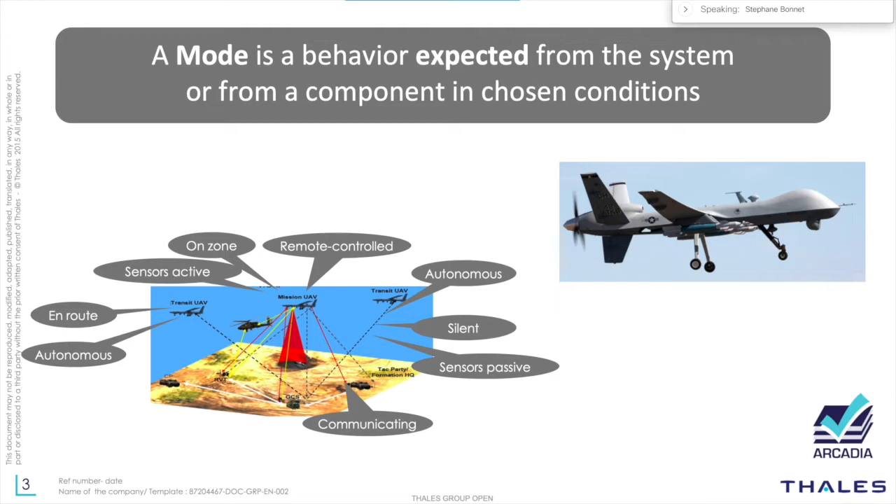A mode is a behavior that is expected from the system or from a component in chosen conditions. So if I take the example of a drone, the drone can be in autonomous mode, it can be en route, it can be on zone, remote controlled, silent, communicating, and so on. So these are all contexts of operation that are planned and that are part of the capabilities of the system.

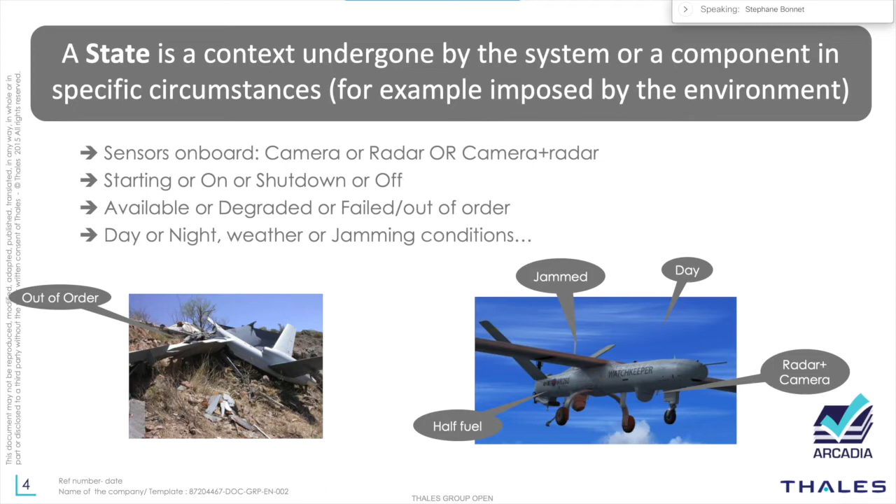A state is a context that is undergone by the system or a component in specific circumstances. Sometimes these circumstances are imposed by the environment. The tank can be half full. We can have night and day, different combination of sensors, not necessarily chosen, but this is something we have to cope with. And this is the main difference we do between modes and states.

A situation is a combination of states and modes at a given instant. So for example, we might have different phases in the missions. The system might have different modes, for example, autonomous or remote controlled. And then each of the subsystems might have their own state machines and mode machines. So what we call a situation is really one given context selecting the current mode or the current state in different modes or state machines.

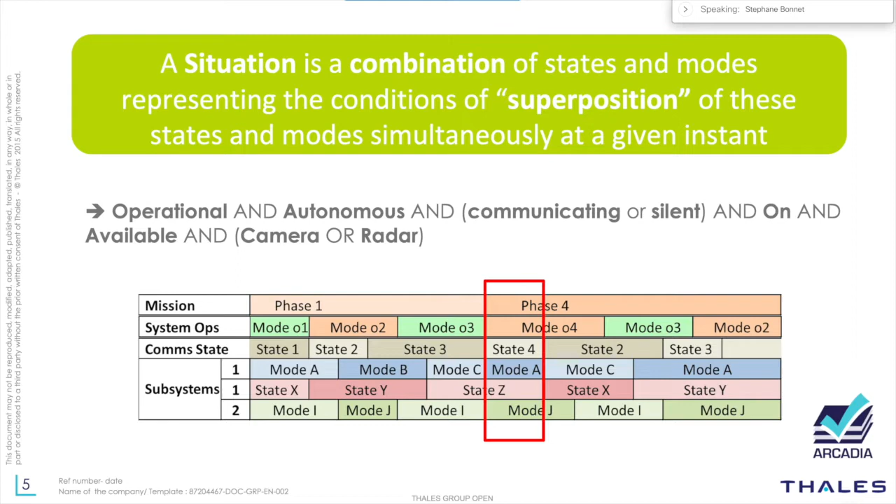A configuration is a set of system parts or capabilities or functions that are globally available or unavailable in one given mode or state. So for example, reconnaissance or localization or targeting capabilities and so on might be available or not, depending on the current mode or the current state. So we'll see how we will use the configuration concept to specify the impacts of modes and states on the architectural design. Later in these slides, you will understand why this box is red on the left and kind of greenish blue on the right.

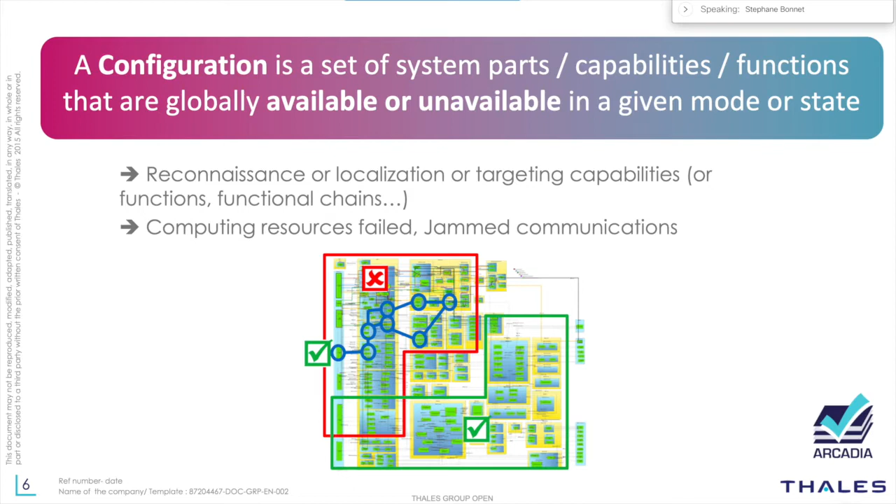So what are we trying to do here? Our systems are, of course, more and more complicated, and what we are expecting from the systems is also more and more complex. So what we are trying to do is to understand how the system will behave in specific situations, situations being a combination of states and modes. We want to be able to predict or anticipate the system behavior. We want to be able to compute or to perform non-functional analyses in different situations.

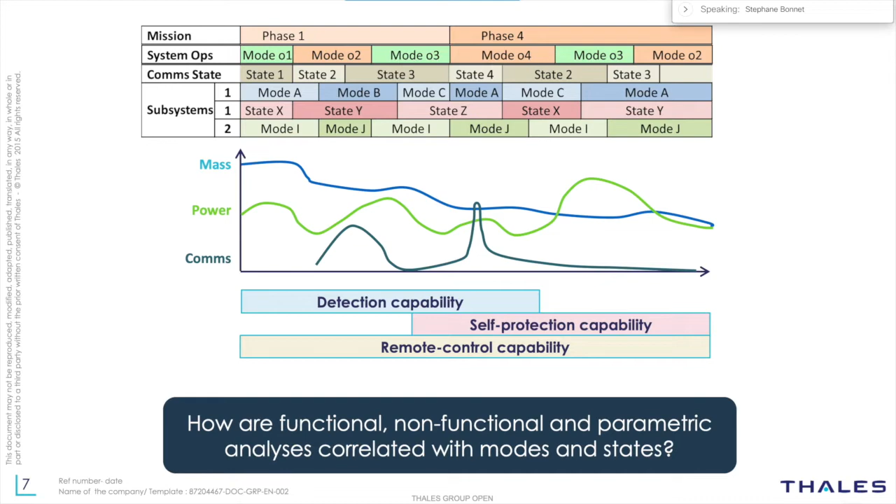So this is basically the problem we are facing, and the problem that our systems engineers, when they write their design documents and so on, struggle to capture. So I will start with the methodological approach, and then I will illustrate it with a use case. The methodological approach has been the most difficult part and the biggest achievement of this effort.

We knew how our systems engineers were working, basically doing matrices and tables, establishing correspondences between modes and states and relating them. We implemented the concept of configuration to help our systems engineers specify what was available in one given mode or one given state. And we gave them a prototype. They played with this prototype, adding the configuration concept to Capella, during about 1 year. But the experimentations were not really satisfying.

We were not able to put our finger on what was missing in the articulation between the concepts of modes, states, and configuration. Until one day, in the middle of a brainstorm, we kind of saw the light and saw that what was missing was the concept of situations. So back on the methodological approach. So everything starts with modes and states. We introduce the concept of configuration to specify what is available in terms of functions, components, interfaces in one given mode or in one given state.

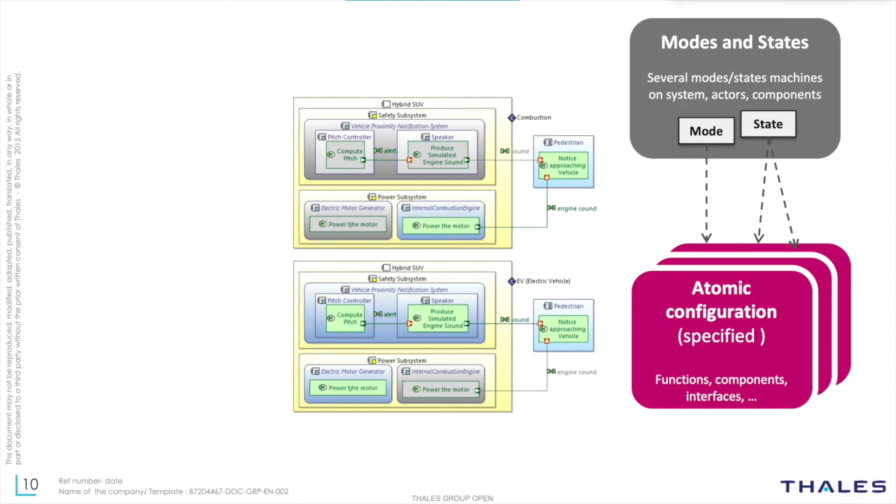In the Capella diagrams, we are now able to preview the impact of one given configuration on any component. In this example, on the top we see a hybrid SUV, which is in combustion mode, and all the elements that are not part of these configurations are grayed. In the bottom, this is the opposite. We visualize the electric mode, and then only one component is grayed. So we specify atomic configurations that describe what is exactly available or not in one given mode or one given state, and we preview that in Capella diagrams.

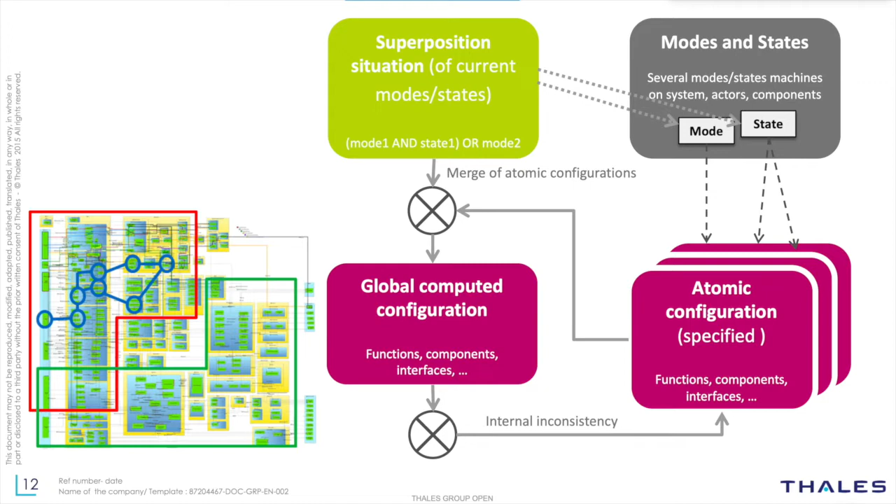Based on this situation, and based on the atomic definition of what is available for each mode or each state, the tool is able to merge the atomic configurations and compute a global configuration that specifies what is present, what is not. Here, we can sometimes detect inconsistencies, because in one mode I've specified that one function is present, and in another one I've specified that the function is not present. This might be a specification issue. This might be an architecture issue. So we can rework it until we reach a satisfying global configuration.

On the other side, we can also use the configuration concept to express the expectation we have from the system in a specific situation. Here, we would rather associate functional chains and scenarios to this configuration of interest. And what we want is to make sure that these functional chains and scenarios can be played entirely in one given situation. So to do that, we are going to compare this global expected configuration of interest and the global computed configuration that is the sum of all the atomic consequences of each mode and state that is part of the situation.

So this is the general frame of the approach, and this is relevant for system, actors, components in any Arcadia perspectives. We can conduct the same kind of approach in system need analysis, logical architecture, or physical architecture. The principles remain the same. And what we see on the slide is really the complete approach, but it is really possible to have only a partial application of that. Some projects will only care about working on the consistency of the atomic configurations, and some others will maybe not associate atomic configurations to their modes and states and will only have global configurations of interest to capture what is expected by the customer, for example, in specific situations. So we can have partial applications of this approach.

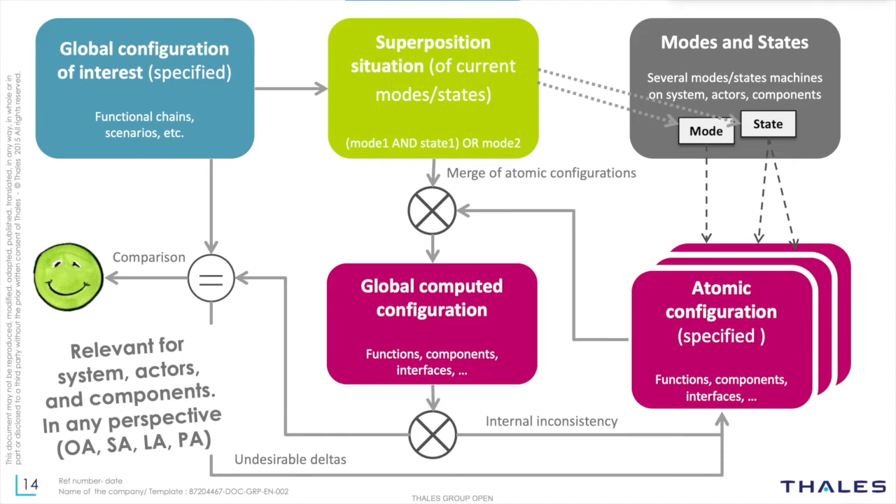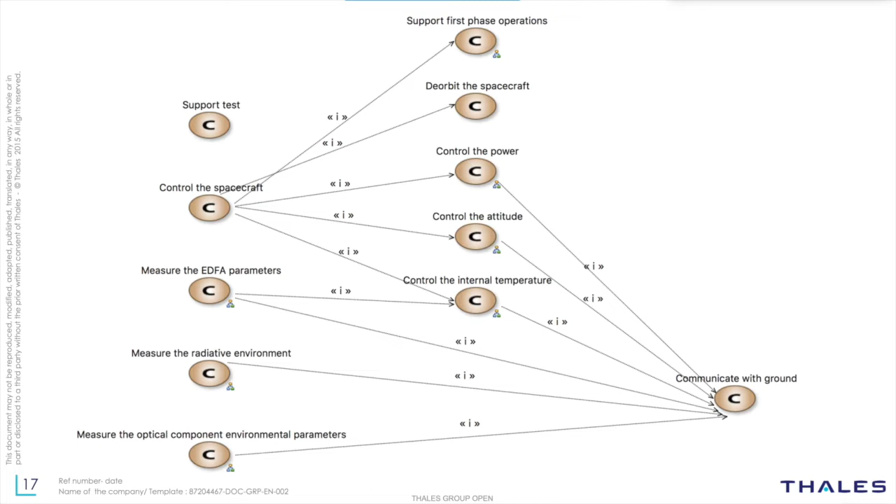What you see on the slide is a lot of flashy colors. They have a purpose. They will help relate the method steps in the case study that I'm going to explain now. So the case study is a small nanosatellite that is dedicated to the measurement of environmental conditions that are undergone by the payload. They basically try to measure the deterioration of hardware components that are sent in the space environment. So it's a simple system that covers measurement activities, capabilities to control the spacecraft, and of course, communications. These are the main capabilities of this simple system.

Our goal is to support system specification elaboration and help analyze its consistency. It's to support the architecture early validation, and in the space domain to support fault detection, isolation, and recovery. So first, I will really focus on the system specification, so the system need analysis in Capella. So everything starts with modes and states. We have several mode machines and state machines, so there's nothing new here.

We have the system modes, so the system modes are fail-safe, detumbling, safe mode. When the nanosatellite is operational, then it can be nominal or no communication, in experimenting or no current experiment, or the satellite can be in eclipse mode. We have states for the environment. Is the ground visible from the satellite, or is the ground not visible?

Is the sun visible from the satellite, or is the sun hidden? And we also have the system phases that we specify using modes. So there's the launch, the transfer, then the satellite is in orbit, and then it's deorbiting.

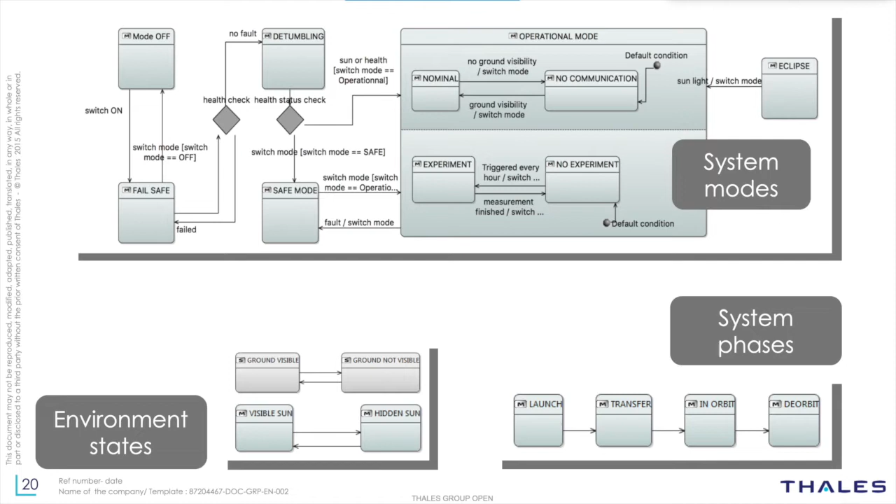So there's nothing new here. This is pretty standard. We can associate transitions to functional elements and so on. This is all things that have always been available with Capella. You can exploit these modes and these states in Capella sequence diagrams or interface diagrams and so on. So the same, nothing really new here.

What is new starts here, when we start to introduce these configurations. Configurations can sometimes, or maybe most of the time, be mapped in a one-to-one relationship with the modes and states. But not necessarily. As I've said a bit earlier, different modes can share the same atomic configuration, meaning the same setting of the system, the same availability of components and so on.

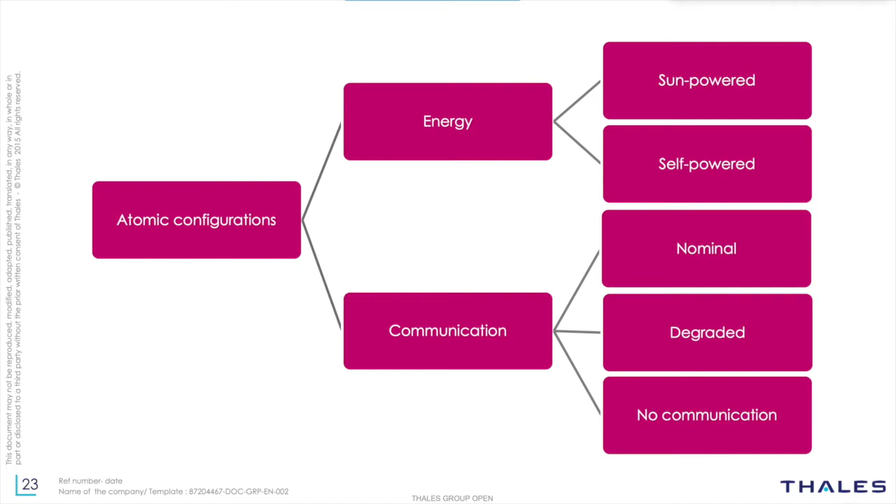So for the satellite, I give a few examples. The ones that are related to energy: the satellite can be sun-powered or self-powered, like working on a battery. And when it comes to communication, communication can be nominal, degraded, or no communication at all. So these are atomic configurations that we specify in this small example.

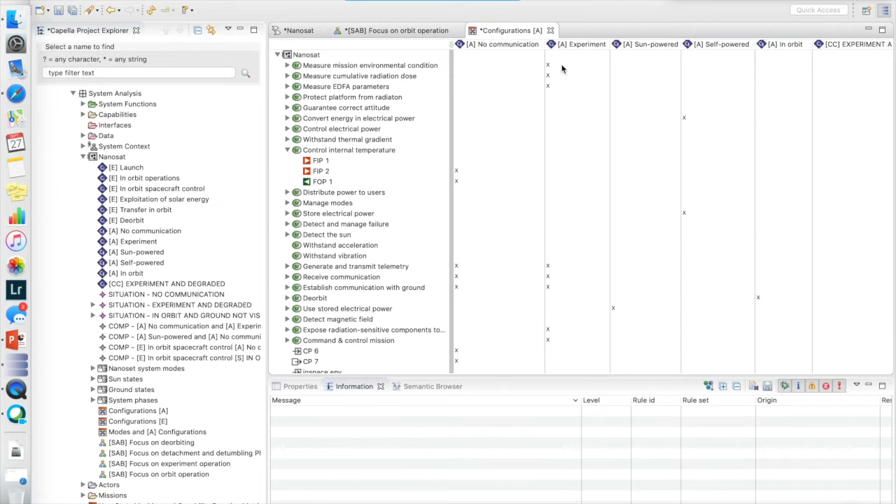Now I'm going to play a little bit in the tool to show you what a configuration looks like and how we can preview this configuration in a diagram. So the first thing is a table that allows to specify the content that is expected in one given configuration. Each column is the specification of one configuration. We can also see or specify that using a dedicated dialog. So I can do that here.

We see that the configuration can include functions, functional chains, component ports, scenarios, or any kind of elements. And we can define a configuration either by inclusion or by exclusion. By inclusion means I need to explicitly specify everything that is available in this specific configuration. If I'm using the exclusion approach, then I just need to specify what is not available in one given configuration.

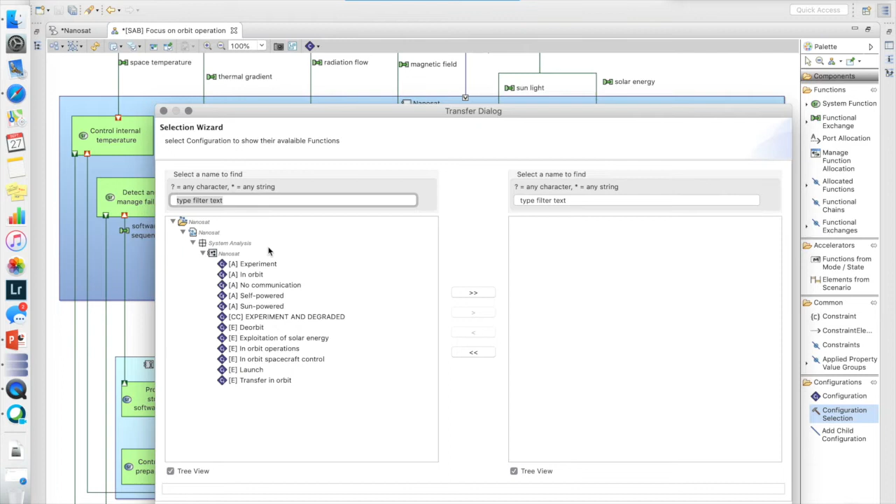Then I can display one diagram. So this is a SAB, System Architecture Blank. And I have a new section dedicated to visualization of configurations. So I can select this tool, come here, and select the configuration that I want to see on this diagram.

So the no communication configuration here specifies that these three functions are not available. And it also specifies that uplink and downlink connections with the ground control are not available. And we have also specified that each of the ports of the functions that are going to or coming from the ground control are not available. So we really have the means to go pretty deep in the specification of what is available or what is not available.

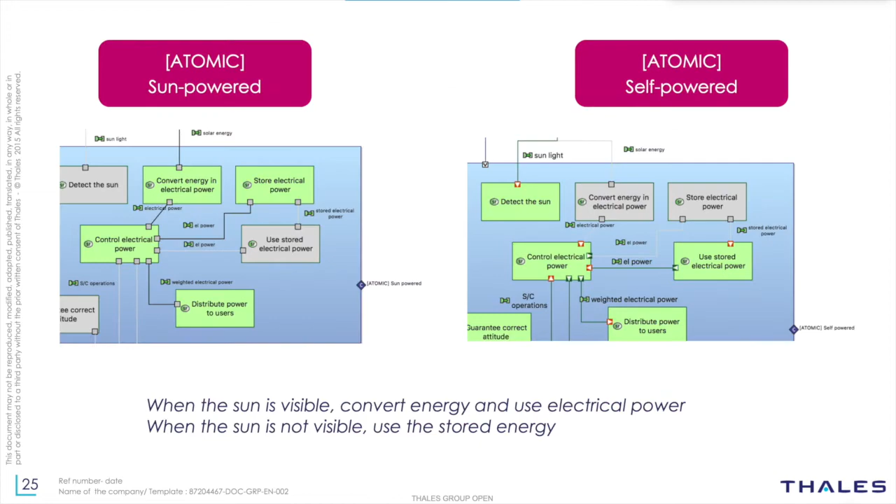So basically, with this atomic no communication configuration, we have excluded all the functions that are establishing the communication, and we have excluded all the connections to the ground. I can continue with visualizing different atomic configurations. So for example, sun powered. This means we can see the sun, so we receive energy that we need to convert into electrical power, and we need to store this electrical power for when the sun is going to be eclipsed.

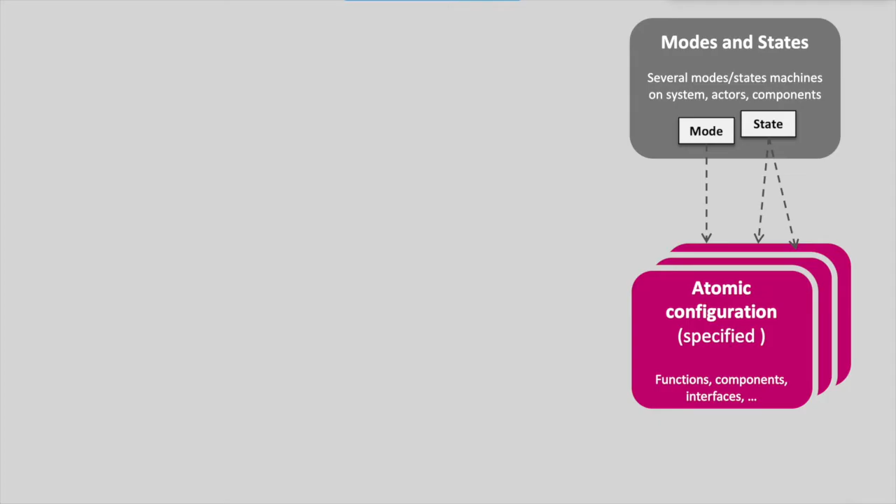And then I can select the other one, the self-powered, and we can see in that case that the convert energy and the store functions are not available. Okay, so we have modes, we have states, we have defined atomic configurations with availability of certain elements, and then we can use a dedicated table to relate these atomic configurations to specific system and actor modes and states. In the simplest case, you would have one configuration per mode or per state. In some cases, you can have a little bit more complex combinations if you want to optimize the specification.

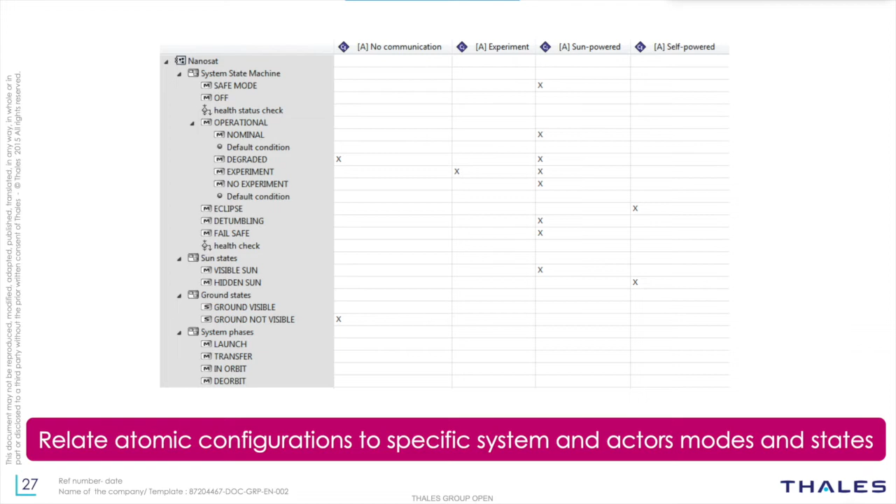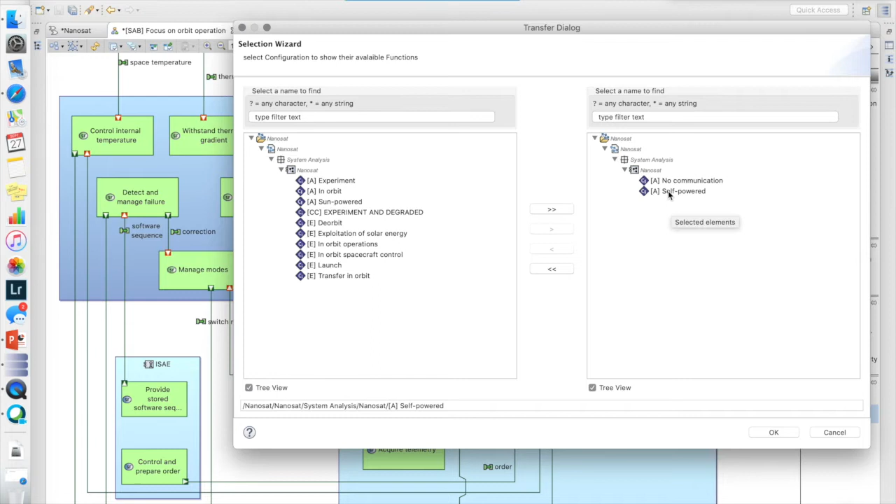On one diagram, I can also see different configurations. So I'm going to do that here. I'm going to display the no communication and self-powered or sun-powered, I don't remember which one it was anyway. So this is what is presented by default. We see the two now here.

So here are the two configurations that are currently being previewed on this diagram. So this one is because of the self-powered, and the three ones and the exchanges because of no communication. We have an option that allows to visualize the settings where we have ambiguities.

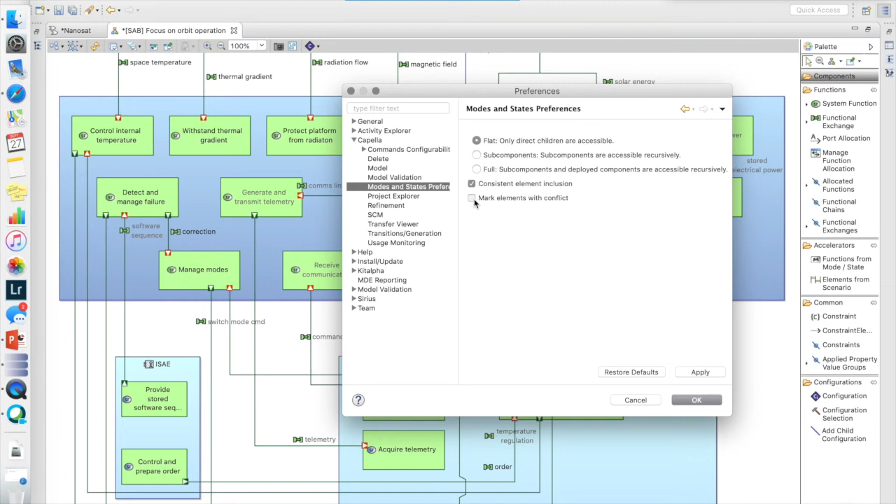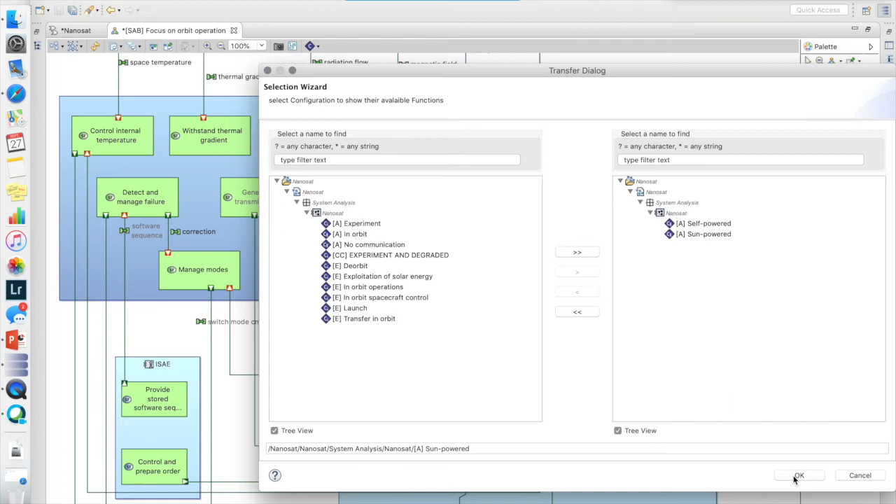I'm going to change the setting in Capella. So it's here, mode state preferences, and mark elements where we have conflicts. So now I'm going to select here both self-powered and sun-powered. So these are two configurations that are not supposed to happen concurrently. And now the functions where there's an ambiguity, meaning that it is included in one configuration and excluded from the other, are displayed in orange.

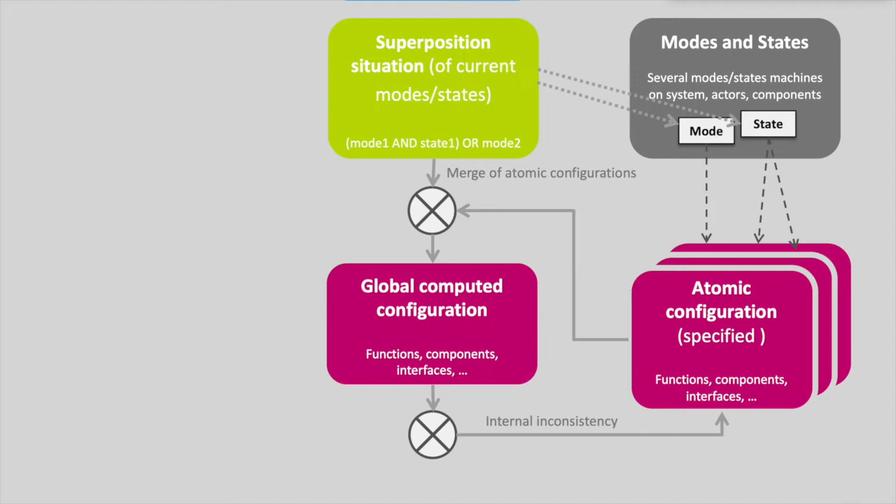So this was what I just showed. So now we had modes, states, atomic configurations. We can now think in terms of situations. In this situation, I can be interested in what happens if I am self-powered and with no communication. Then a validation would show that no problem, the different configurations don't have errors.

Another one would be a situation where the satellite is currently performing the experimentation, but it is degraded, meaning that it doesn't have communications. In that case, we have a contradiction between what is necessary for experimenting and degraded, which specifies that the communication is not available. So the result of this validation here would be there are errors in this setting.

I need to be honest here. This comparison, the algorithm that we use for this comparison, are currently really basic. So the maturity of this part is not as good as the one we are aiming for. But I will explain where we exactly are at the end of the webinar.

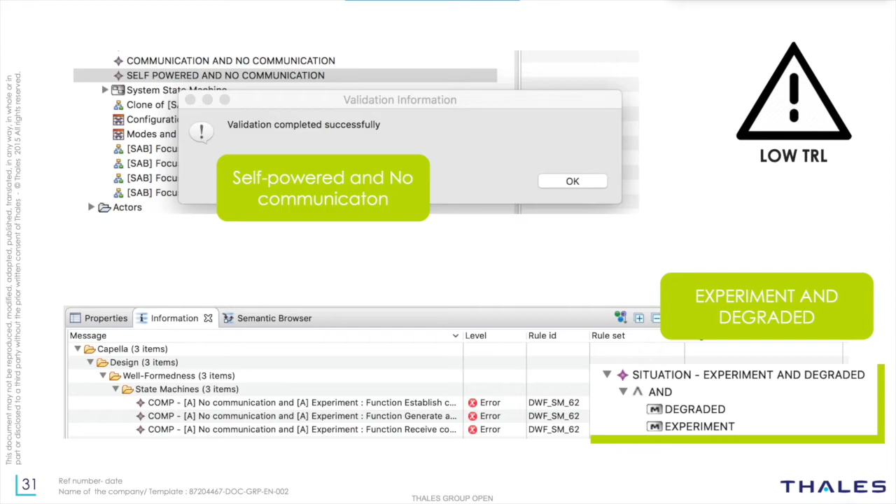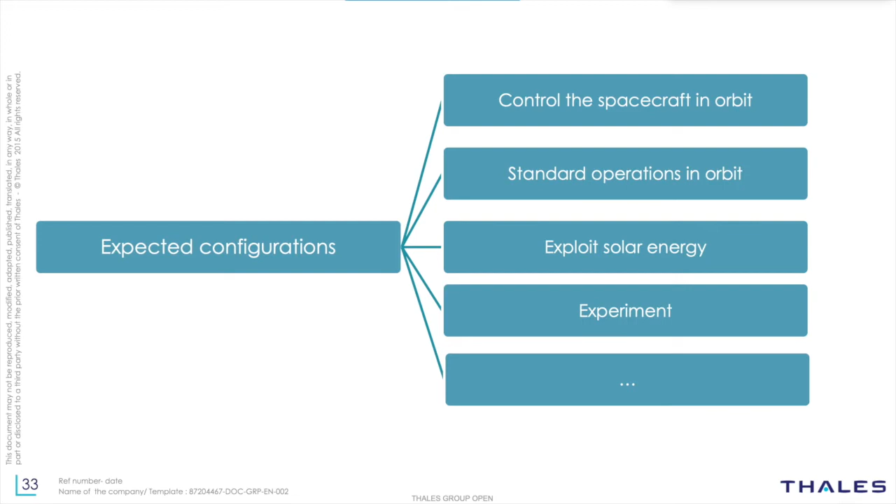So now I switch on the other side of the approach, and I am discussing, for example, with my customer, who is giving me his requirements, and I will do global configurations of interest to capture them. So for example, I will express in terms of functional chains and scenarios what is expected in certain circumstances. So for example, expected configurations would be I need to control the spacecraft in orbit. I need to perform some standard operations when the satellite is in orbit. I need to exploit the solar energy. I need to experiment, and so on.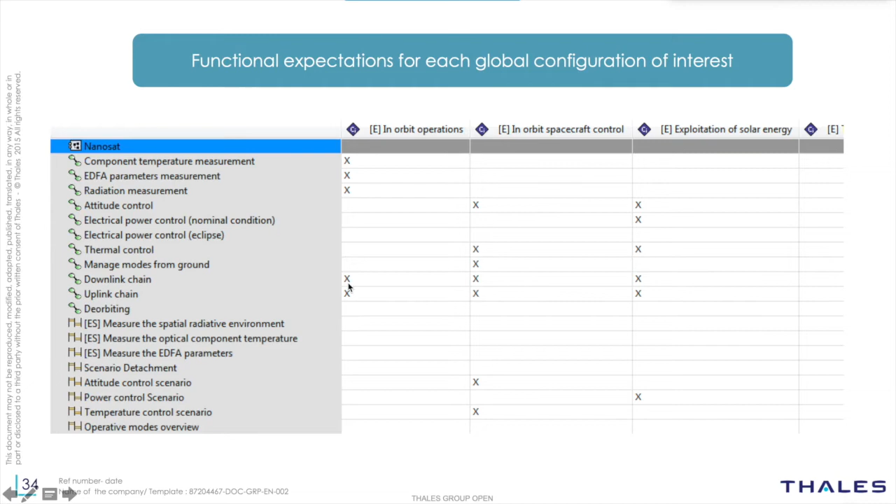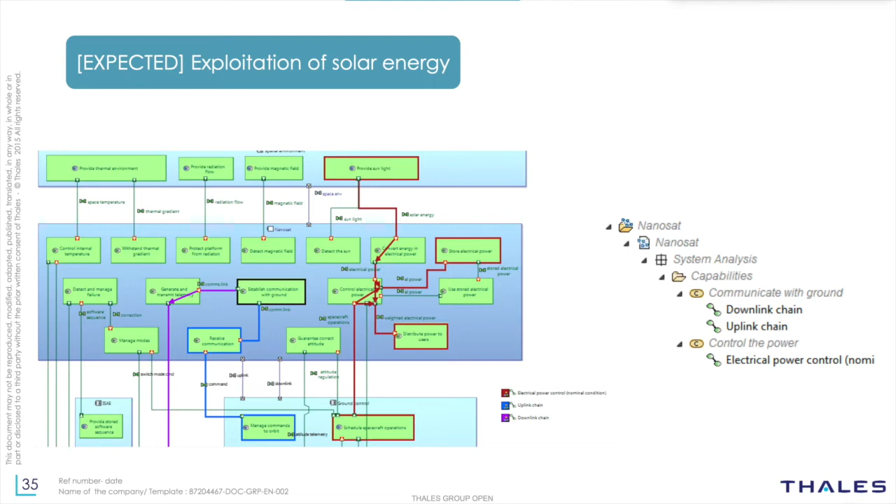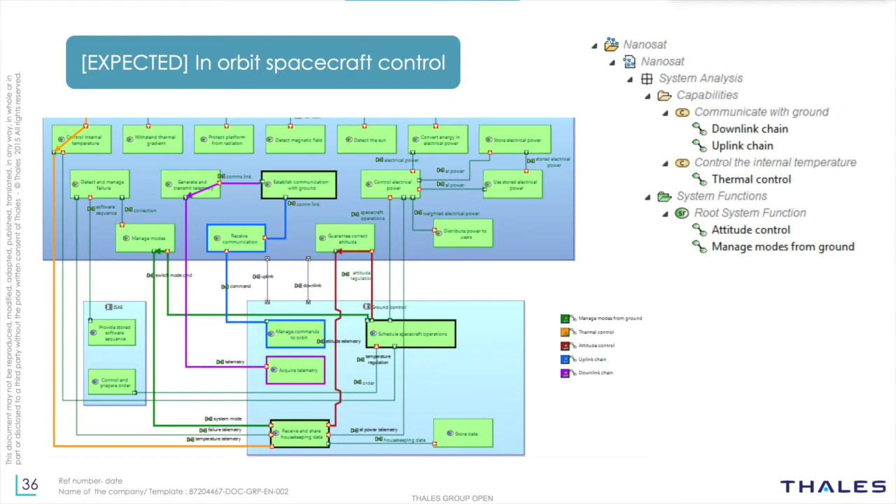And for each of these global configurations of interest, I will use the same definition table as we had previously for the atomic configurations. But this time, I will most likely associate functional chains or scenarios to these configurations. So if I preview what corresponds to the exploitation of solar energy in my architecture diagram, I have 3 functional chains. If I switch to the in-orbit spacecraft control expected configuration, then I will have 5 functional chains.

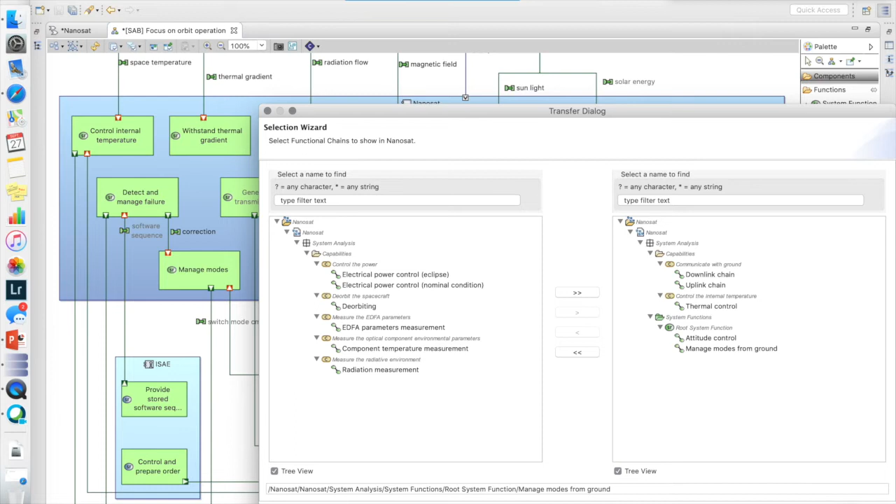So I'm going to display them on the diagram. Insert, remove functional chains, and I want downlink, uplink, thermal control, attitude control, manage modes and states from the ground. So now we see all these functional chains contributing to one specific expected configuration.

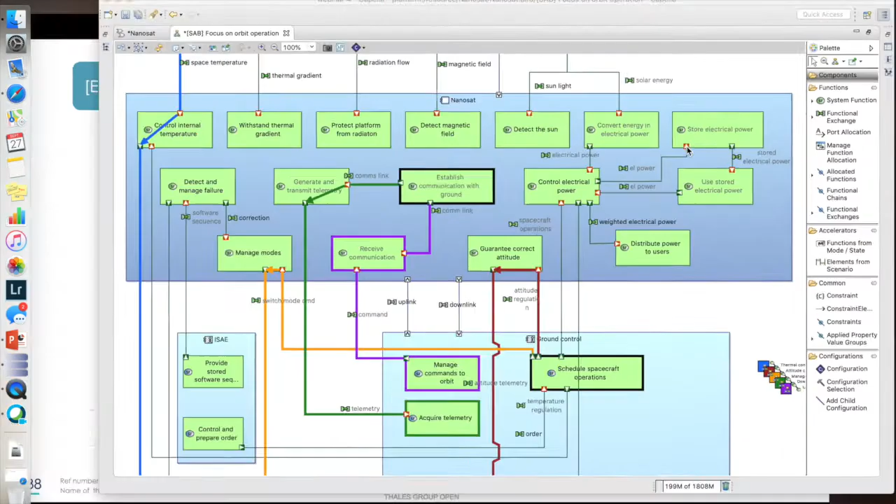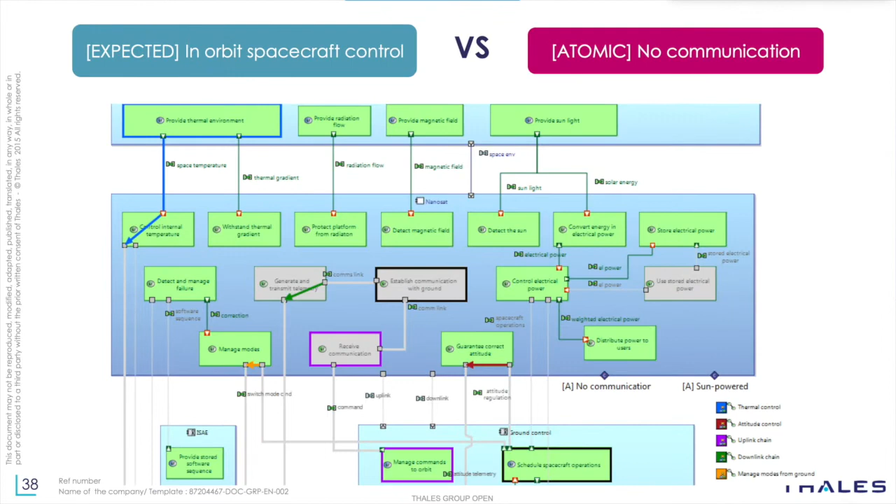And then what we want to do is start comparing the global configuration of interest and the atomic configurations. So for example, if I select the no communication atomic configuration, well, we clearly see that the unavailability of these 3 functions is having an impact on the functional chains that were included in the expected configuration. So this is when I compare that on the diagram.

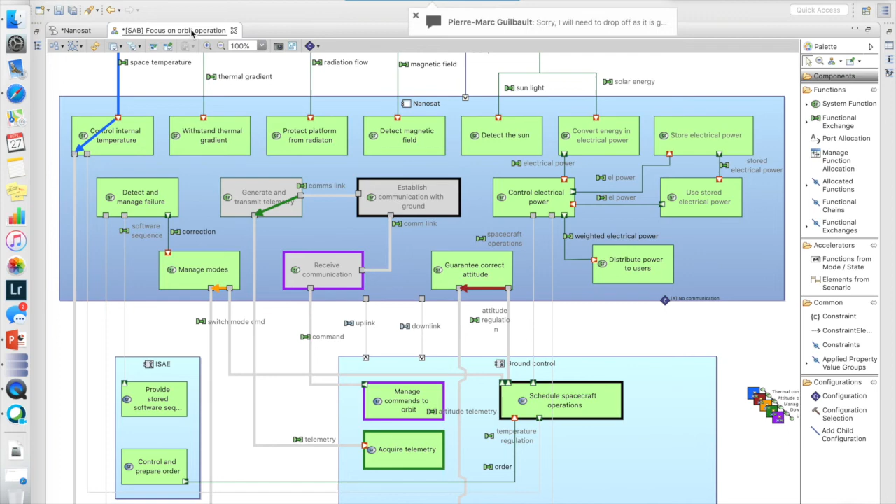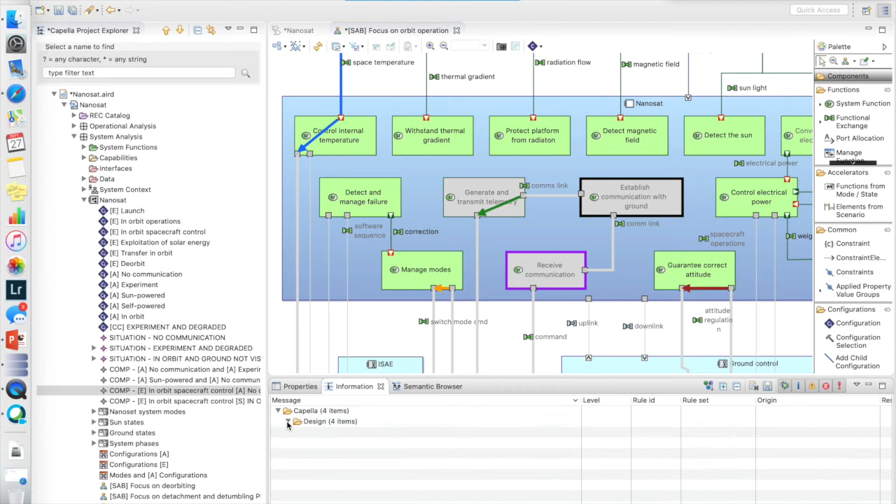I can also directly compare these 2 configurations. So this time I will do it in the tool. So what I want to see now is a comparison between the expected configuration in-orbit spacecraft control with the no communication atomic one. And when I validate this comparison, we can see that we have a set of errors, the same ones that we had on the diagram, except that they come from real model validation, and they are here.

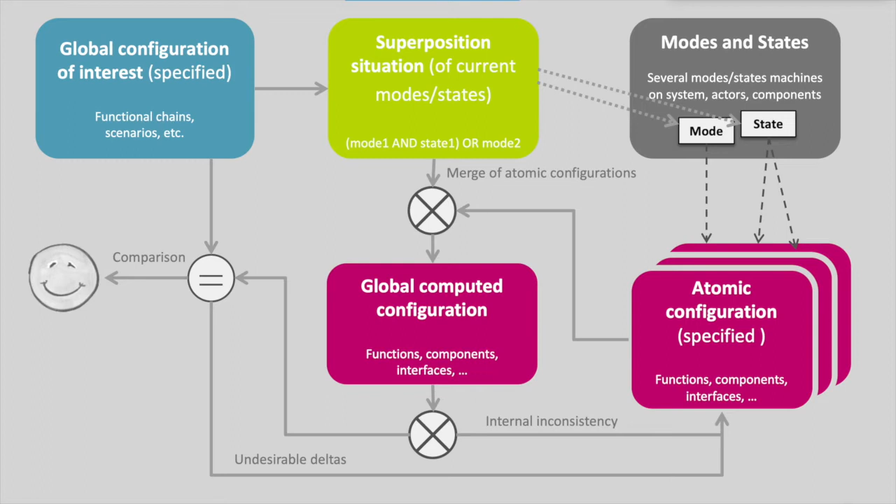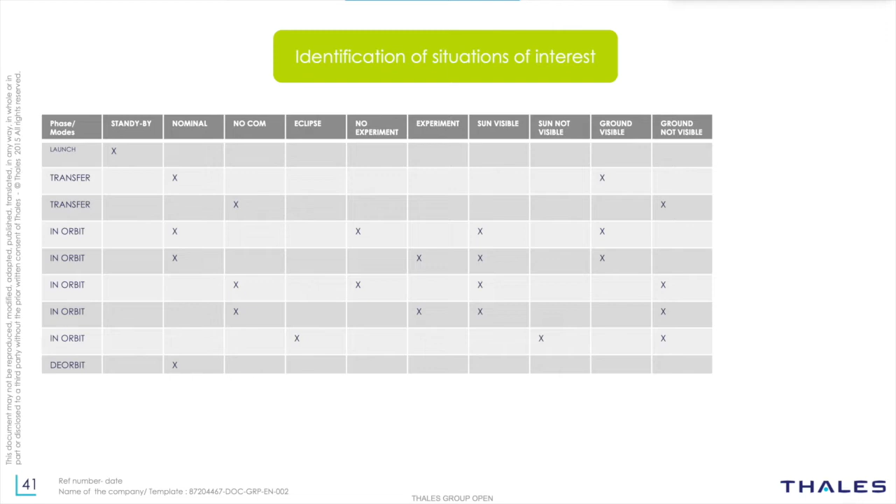And then the last piece of the approach, when we work with the situations, what the systems engineers would do would be to identify the situations of interest. So as they have always done, they do matrices with modes and states and relating them. So we can identify some specific situations of interest. So for example, here, I am going to focus on the situation where the satellite is in orbit, but we have no visibility towards the ground.

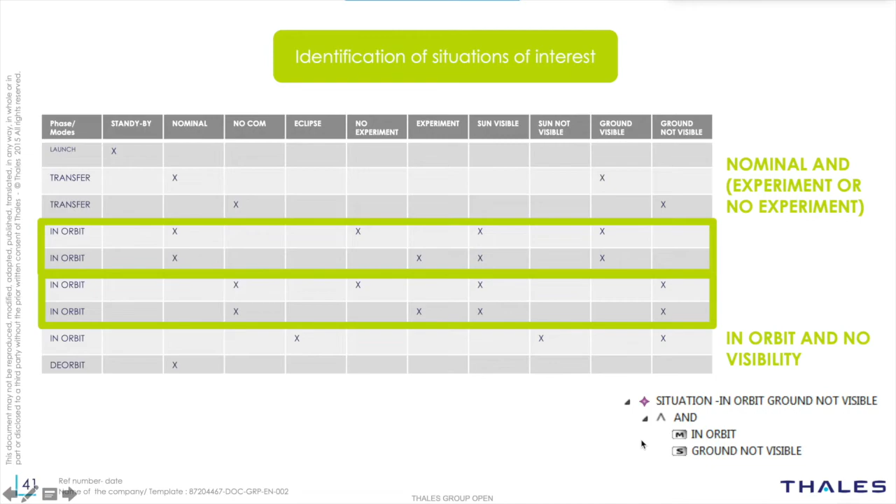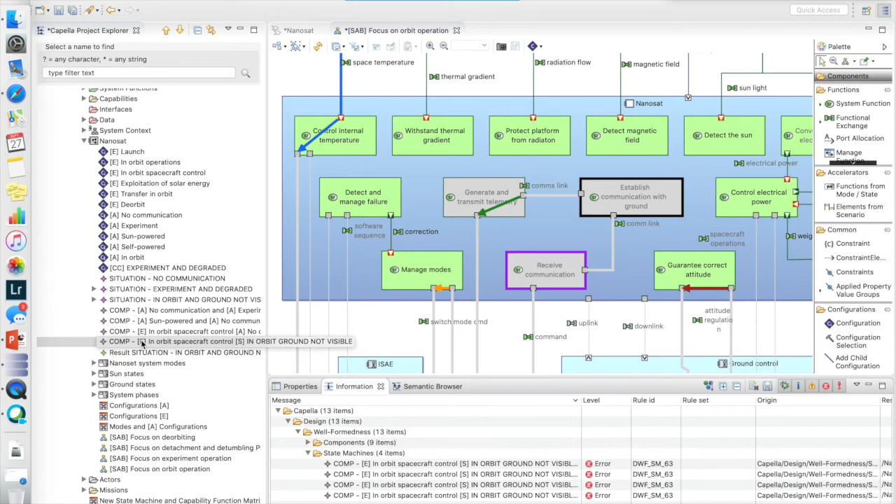I can express the situation here, and we see that in Capella. So I have a situation here which is in orbit and ground not visible. This is here. And for each of the modes, in orbit and ground not visible, we have associated configurations. I can try to request the result and then compare this expected configuration in-orbit spacecraft control with the given situation that I just created. And in theory, I should have a similar result. I have issues when I compare an expected configuration and the situation. So this is what we have here.

We can, for any expected configuration, specify the context, which is a list of situations of interest, and run the comparison, which is what I just showed in the tool. Then if we move in the logical architecture, we could perform the exact same approach. So I'm not going to describe that really precisely.

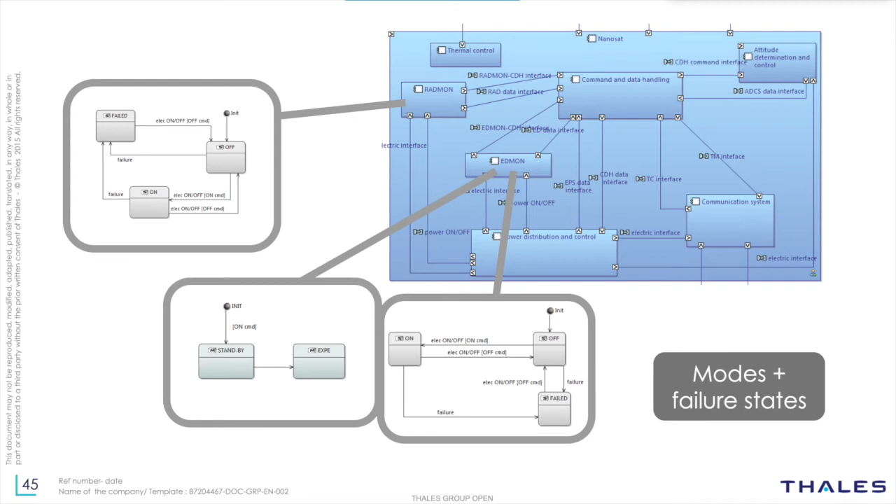I just want to mention that, of course, we would specify modes and states for each of the subsystems or each of the components and identify situations of interest and then try to understand what are the consequences of losing one specific component or losing another one.

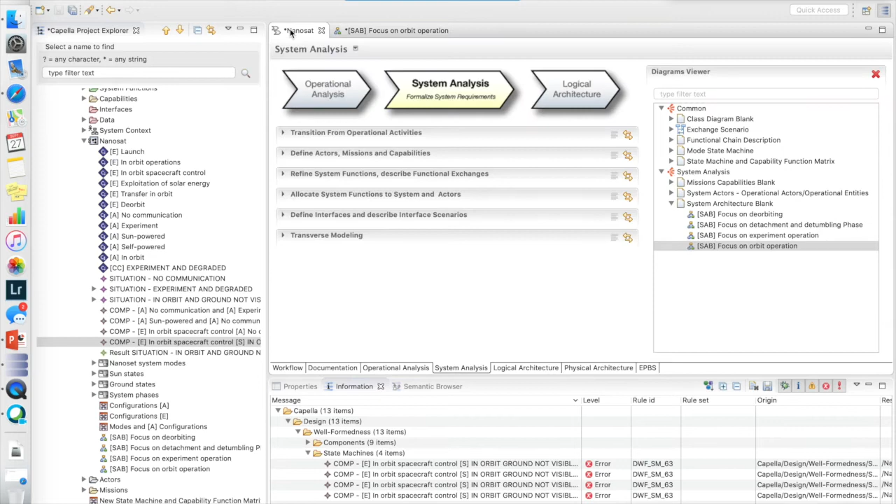And if I go in the tool, and that will be the last part of the demonstration, I can open an architecture diagram in the logical architecture. Okay, and I can preview certain configurations. So for example, on EDMON component, I can display the failed configuration. And on radiation monitoring component, I can display another one that corresponds to the standby mode.

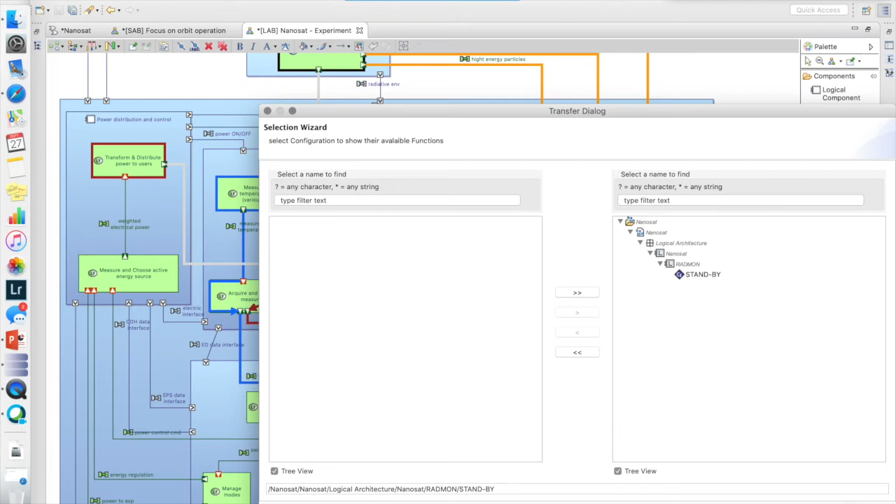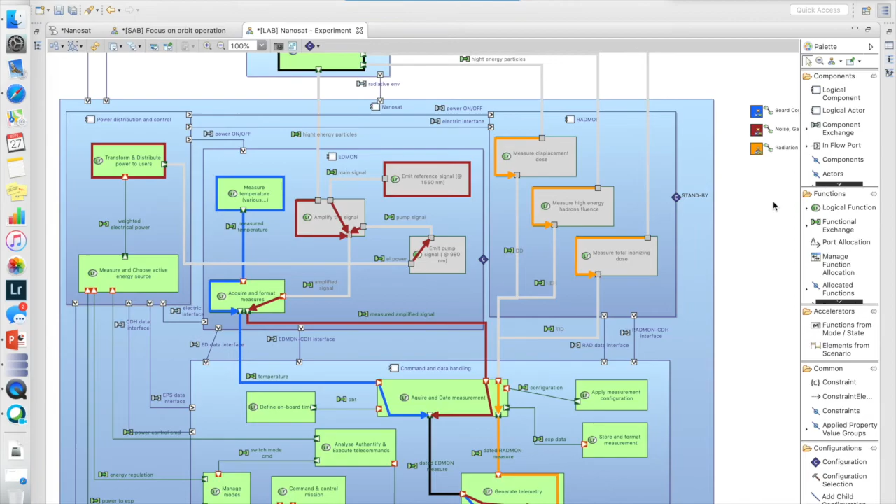So we see for each subsystem a specific configuration, and we see the impact that they have on the global functional chains that we expect from the system in its entirety. What I just talked about was mostly about predicting the behavior of the system in specific configurations. So what about parametric analysis?

Non-functional properties that we would add to elements like components or functions, either through proper metamodel extensions or using property values like profiling on top of Capella, can be related to configurations. The computations that we would make could also be contextual to configurations. It's up to the developers or the providers of this extension to exploit the configuration mechanism to make their analysis contextual to configurations.

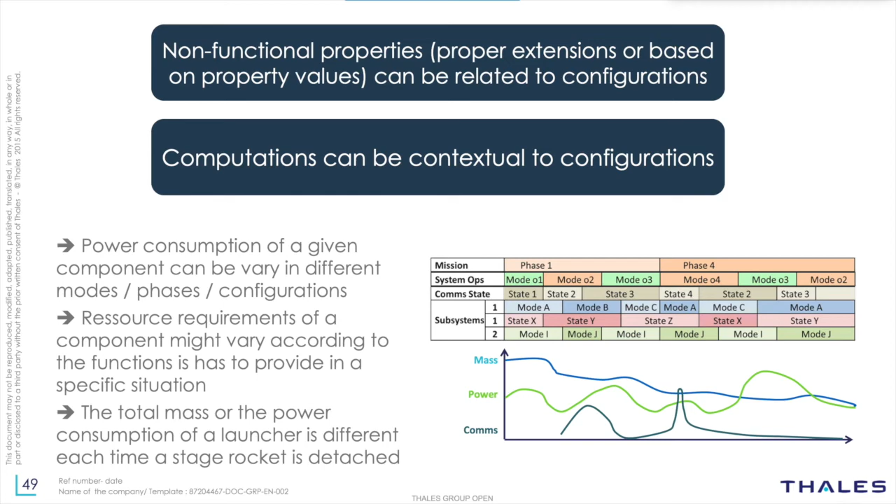So for example, the power consumption of a given component can vary in different modes, phases, or configurations. Resource requirements of a given component might vary according to the functions that it has to provide in a specific situation. Or the total mass or the power consumption of a launcher is different each time a stage rocket is detached. So all these different settings or contexts of the system can be expressed through configurations and situations, and performing non-functional analysis using situations and configurations can be really interesting.

So we're reaching the end of this webinar. Where are we currently now? What are the next steps? So currently, all the tooling that I've presented here is a kind of incubation add-on to Capella. It's not yet part of the core of Capella. It will ultimately integrate the core, but we still need to have more return on experience. There are some things that we still need to improve before it is promoted to the core of Capella.

And this is a summary of the maturity of what I've presented. So we believe we are reasonably mature on the methodological approach. It would be interesting to provide additional guidance for identifying the configurations. Sometimes it's not easy to understand what is a configuration, what is a mode, and what are capabilities, and how can I play with all these concepts, and so on. So a bit more guidance could be useful.

We are reasonably mature on the concepts, configurations, and situations. We just realized that our current implementation of configurations is a bit too binary. So today, when I exclude two functions from one given configuration, it means all the other ones are included, and this is too strong of an assertion. So we need to have something that is a bit less binary, and we need to say, okay, all these elements of the models are not really relevant for this given configuration, so ignore them when you perform comparisons.

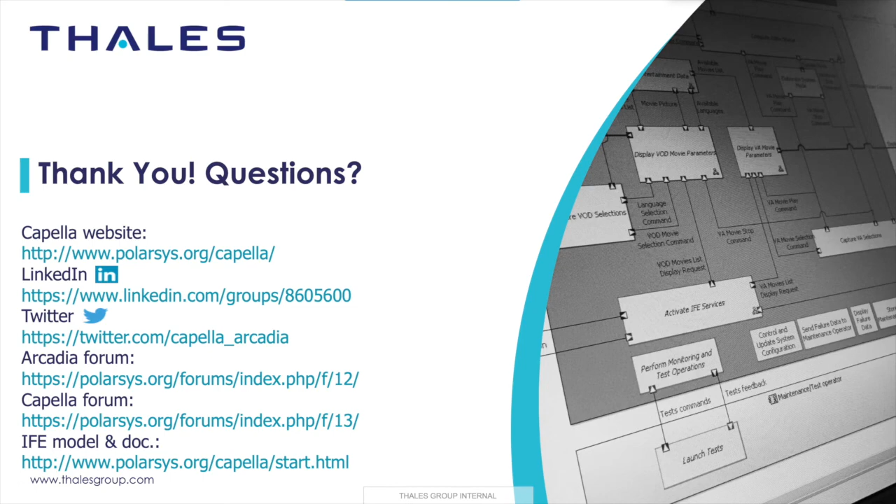Why are you modeling mission phases as modes? Oh. Why not? No, sometimes people do model them with capabilities, but we really understand them more like modes in the sense that there's only one phase at a time. There are transitions between the phases, and these are not things that come with capabilities. We can imagine that some capabilities of the system will be relevant only in one specific phase, but it's not necessarily a reason to have one capability per phase.